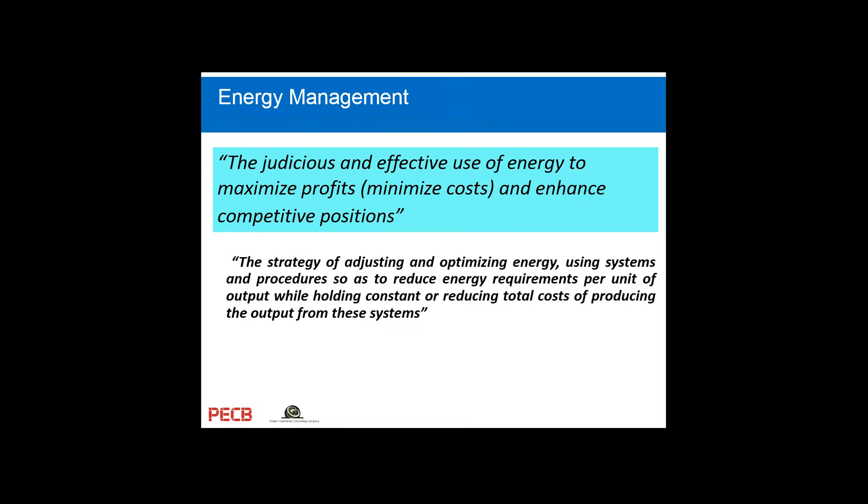This is what the energy management system is all about. Why do you want to implement it? Because you want to realize the savings. At the end, you have to give the savings in numbers.

If we take the term REDUCE to talk about the objective of the energy management system: R - reduce energy; E - educate your staff and students on energy and water management; D - document and publish information to achieve improvement; U - uphold legal requirements regarding energy use; C - continuously improve our performance and system; E - effectively utilize energy-effective products and efficient products and services.

What is energy management? You probably heard this term - there's a standard that talks about an energy management system. What is it about? Energy management is doing more with the same amount of energy, or consuming less energy. You're still going to have the same constant flow of energy in your organization, but how can I optimize my use and lower the use of energy so I can save money?

Of course, energy management saves money and makes buildings, organizations, and factories comfortable, healthy, and safe. Once you know what you're doing with energy and you're managing it, you will have, at the end, a more profitable and safer organization.

Of course, ISO 50001 ENMS - and I said why the term N was added - is applicable to any organization, whatever the size, geography, or location.

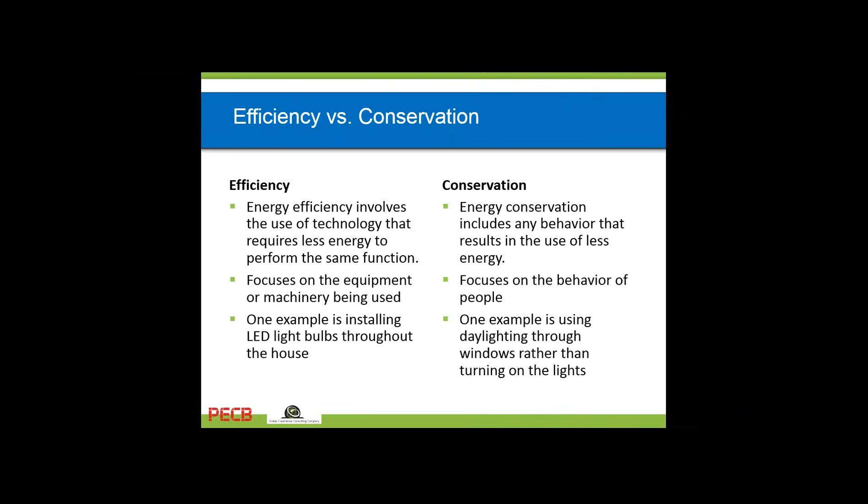Now, why ISO 50001? Why do organizations need it around the world? They need it because ISO 50001 is one-of-a-kind standard that studies your energy all over your organization. To have it, you need policy first. You need top management commitment. You need top management to buy into it so you can fix targets and objectives. You need to use data to understand decisions, make results, and continually improve it.

A system to improve energy performance talks about having energy programs, covers significant energy users, energy saving opportunities and action into planning, corrective action, and audit management programs. We're talking about a program.

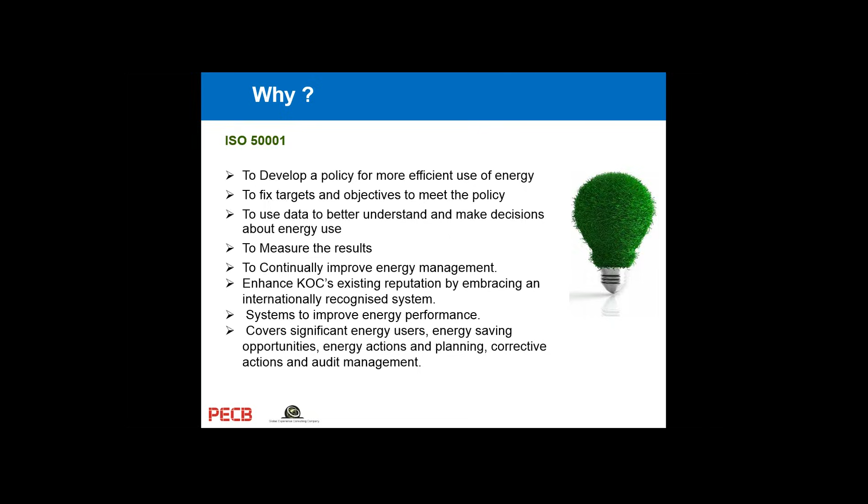For example, I'm giving here Kuwait as a primary energy source, and their consumption is a major source of greenhouse gas emissions. You've seen what greenhouse gas emissions have done to the whole world. It's a main issue now globally. They have in place what we call the Kyoto Agreement that studies the emissions of every country, and there are targets on every country around the world to lower their emissions of greenhouse gases.

Kuwait has now studied the matter of energy management and how the use or demand for energy has increased all over the world over the past 10 years. It's been crazy. So they are now doing an energy management policy to lower the use of its energy and depend more on renewable energy. And a lot of you will ask me, what is renewable energy?

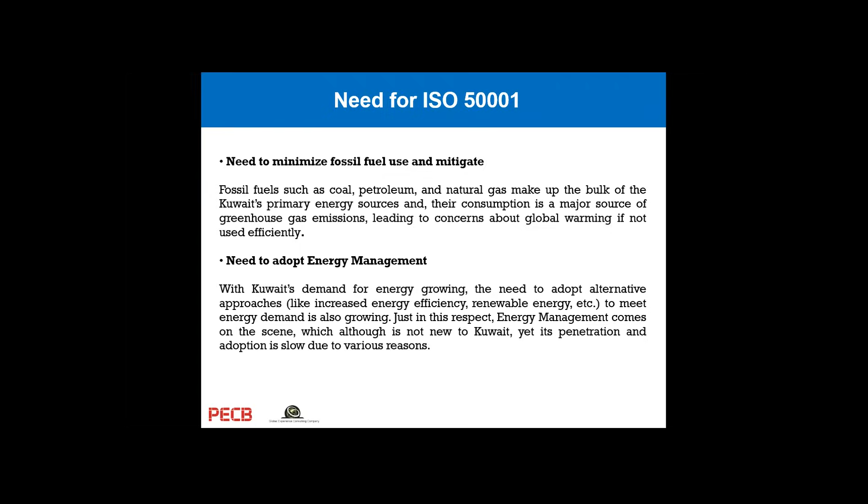Renewable energy is just like energy that doesn't stop producing from the source. We're talking about the wind. We're talking about the air. We're talking about the solar. We're talking about the heat and all of that. I'll talk about other examples from all over the world, but now I'm taking a specific example till we reach the international mind of applying ISO 50001.

The benefits, the main broad line of energy management: reduces consumption, increases comfort and safety, reduces pollution, makes our economy stronger, and increases our energy security. What I mean by energy security: when you consume less energy, electricity, water or gas, you give your country an energy security blanket where they can have more energy stored and transmitted when needed instead of consuming more. This is what we mean by the term energy security.

Now, the energy management system was issued in 2011 based on demand, and it gives organizations a model for continual improvement concerning their energy policy. It provides fixed targets, objectives, and targets to meet the policy. It uses data and measures the result. Now, you can ask me what's the difference between this system and 9000, 14000 environment, 18000 occupational health and safety, RC 14000.

I think the main difference between this standard and all those other standards is you have to sit down within your organization and draft a paper, start calculating, for example, your kilowatt per hour. The calculations are your baseline study where you can compare how you can improve in the future. So this system is not about management where we sit and discuss and come up with meetings, agendas and outputs. No, it's about measurement. You need to measure how much you consume of any kind of energy you're using.

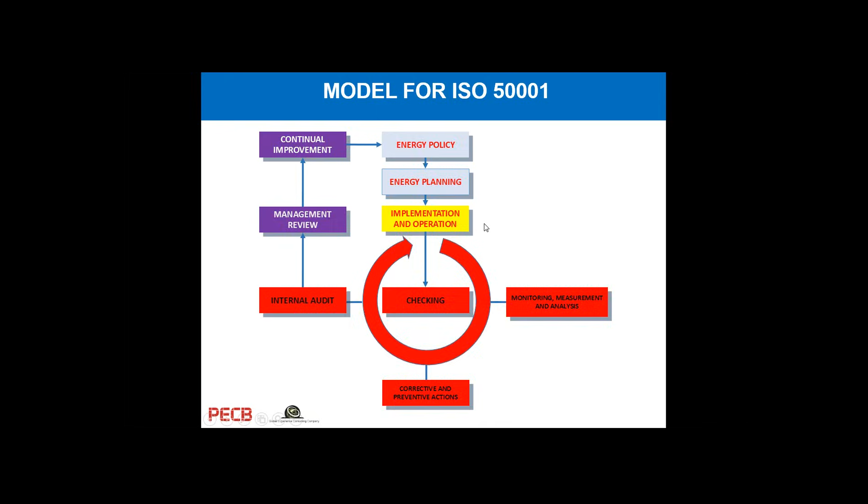We know the objective. We want to reduce energy consumption. We want to minimize energy cost. Does this flash a light for all organizations around the world?

Absolutely. Because if you ask any top management that runs a big facility with major energy consumption about reducing energy cost, reducing waste, and the effect on quality and product - the more efficient your energy use, the more reliable your machinery will run, because energy will always be there. So you'll have less downtime, less breakdown in manufacturing and equipment, and a more efficient organization. It works absolutely.

This is the weight of energy saving compared to other technology. Look at these statistics issued by the IEA, the International Energy Agency, comparing carbon capture and storage, nuclear energy, biofuel, renewable energy, to energy saving. Look at the energy saving - it's a big weight today compared to the use of all these other energy sources.

We'll discuss this further in my slides, but let's continue what we're discussing. You want to talk the language of top management when you implement any system, because top management will ask you: why do I need to buy into it? Why do I need to implement this international standard issued by the ISO organization through a technical committee that drafts the standard? Why do we need to use it?

We need to reduce our energy bills, especially with fluctuating prices. Two years back, oil prices were at $120. Today they are $60, and they're expecting them to go back to 80. These fluctuations make your production or consumption unstable. How can you stabilize your organization? You reduce your energy bill. You make your manufacturing more sustainable with a constant flow of energy, because the less you consume, the more output you can get from that energy.

You promote energy efficiency throughout your supply chain. You can talk about it to your suppliers, your users, your customers, your community, your stakeholders - everybody around your organization. That could be your employees, your customers, your suppliers, your top management, the board, or the community and environment surrounding that organization.

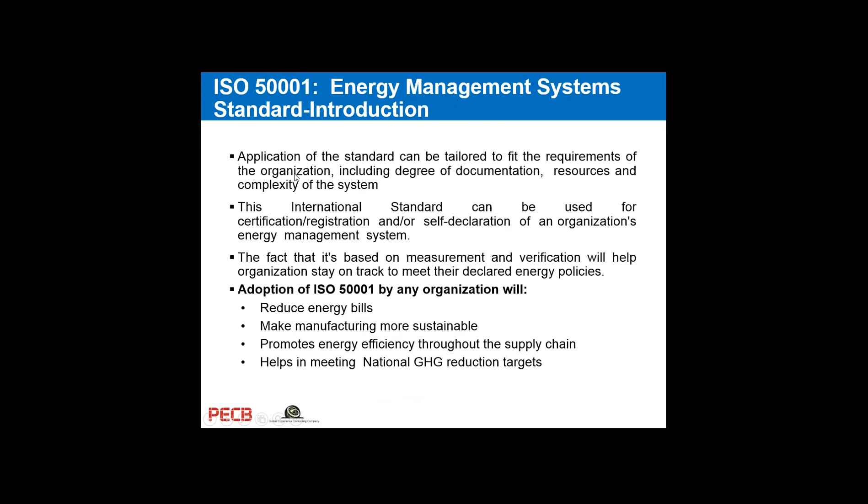Of course, when you consume less energy, you have less emission into the air. So you're helping the national greenhouse reduction target, and you're complying with the Kyoto Agreement, which tells you we need to minimize the consumption of energy. Do we need to minimize fossil fuel usage? Yes, of course - fossil fuels such as coal, petroleum, natural gas.

I'm giving an example of what they're doing in India. They are studying these sources and minimizing them through efficiency, because India's demand today is growing and very high, and they need to adopt alternative approaches. They're doing it - they have something called an energy management outcome, where if your organization develops or starts using renewable energy, the top government body will support you with subsidies, less taxes, more data and information, supporting it as a national energy management system.

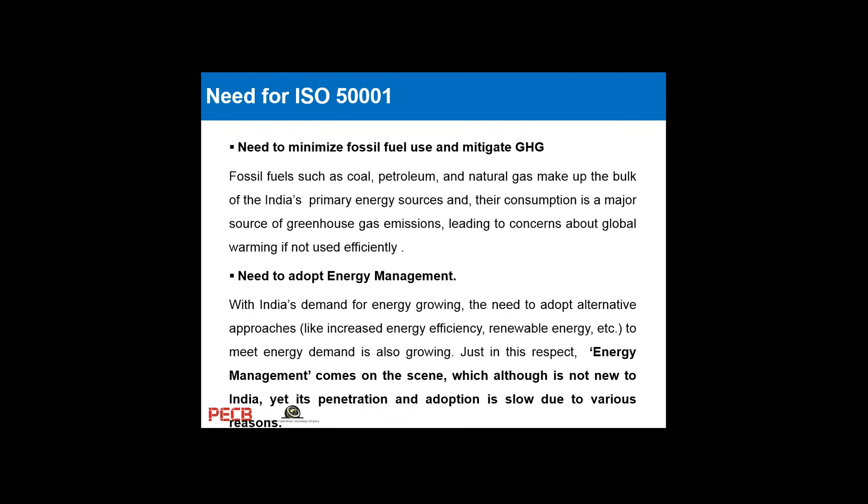But we know how the economy is growing in India, so it's part of what we call communicating the effectiveness of the energy management system. Now, what is the requirement?

Does the energy management system, EnMS ISO 50001, have certain requirements? Yes, it does. First you need an energy policy. Under the policy, you need objectives and targets, and an action plan to support that policy.

And you need an energy supply, uses and consumption study. You need measurement. A lot of people say, I reduce electricity by turning it off whenever I'm leaving the facility — that's not 50001. You have to tell me how much you are consuming. What is the design data? What is your procurement? We even study your shipments, how much raw material you're receiving, what are the shipping sources, and how much energy you're consuming there.

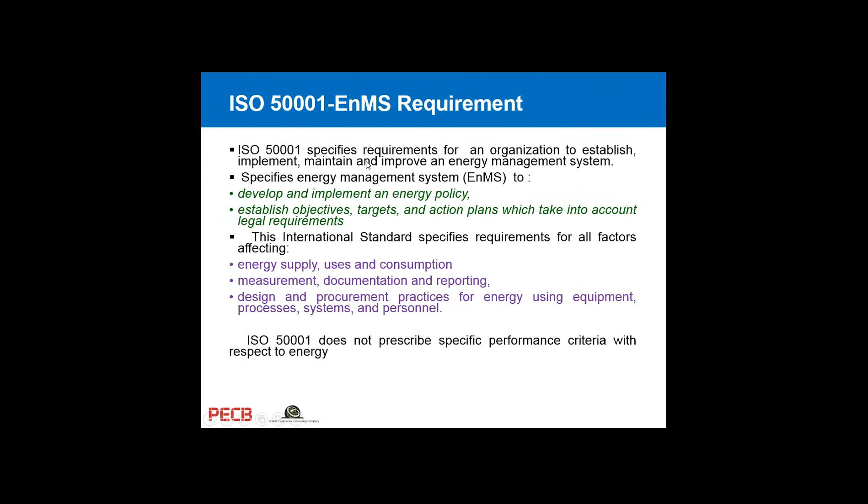We study everything, even the design and procurement practices, the design of your process and operation. How did you design it? How did you design your facility? Can we improve the design of the facility or the design of the equipment? You have two aspects of design here: design of facility, and design of your equipment and processes.

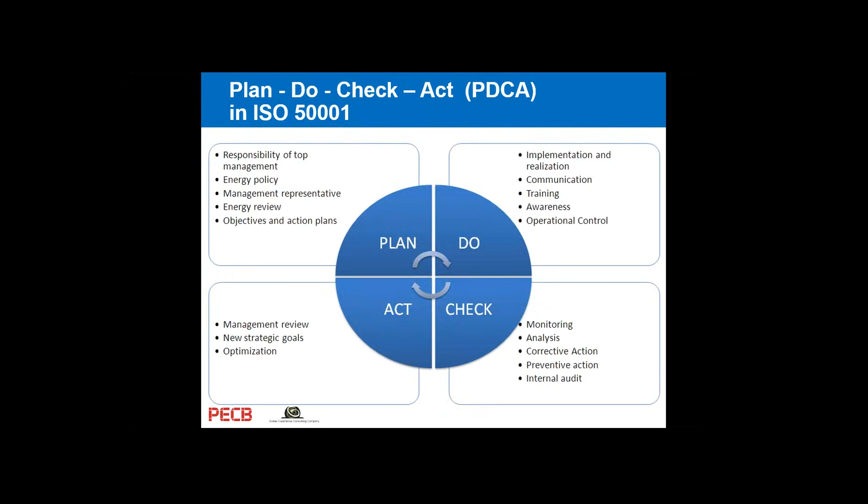As I said, this is Plan-Do-Check-Act, the main component of ISO 50001. I've developed them into a plan which talks about policy, representation of management, energy review, objectives and targets. Then do the implementation, the communication and training. Then check the monitoring and measurement. And act, which is the management review, where we study the strategic goal and optimization, and how we achieved them. This is again the PDCA cycle I talked about.

Energy management — what do we start with? The main point we start with is the policy. We talk about the availability of policy, and inside the policy we need the scale and nature of the organization to be documented. We need availability of resources and support. We need communication and commitment toward the policies and toward regulations and other requirements.

You cannot say, I'm violating the law, I'm using energy that's not acceptable by the government, but I'm applying ISO 50001 — it doesn't work that way. You need to apply applicable regulatory requirements to set forth what you are doing, and make sure you are applying the law of the land where you operate before you hit ISO 50001.

And last but not least, support the purchase of energy efficient technologies and services. You cannot sit in your factory and say I'm not going to do anything about it, and if a new machine comes in I'm not going to worry about studying its consumption or prices because I can't afford it. Today, an energy management system will help you afford buying new technology by minimizing energy use and achieving more savings.

For example, in India, energy policy declaration by an organization is seen as a top management commitment toward continual improvement. By the way, we don't use the term 'continuous' anymore, because continuous means doing it around the clock for 24 hours. Continual means you do it within your capacity or ability to apply the energy performance plan.

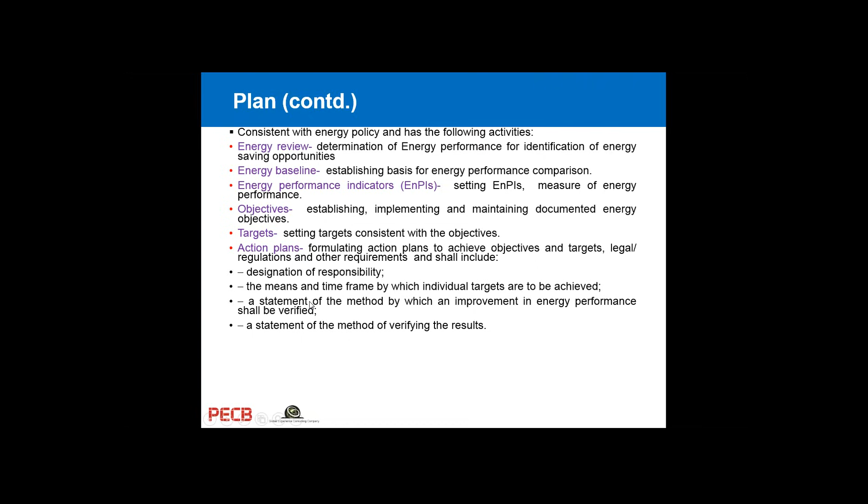All right, the action plan, we know what it's all about. And then you go into implementation and operation, the 'do'. After the plan, remember: plan, do, check, act. We need to have an action plan to communicate it to the workforce.

You cannot tell me that you are implementing an energy management system and you don't have the energy management system policies on your website, on everybody's computer inside the organization, on the walls, on the entrances, so people know that you are turning off all the lights whenever operations stop to save energy, that you are using large scale windows that let light in so you can use less electricity inside the organization, that you are moving from a regular bulb to LED to save energy, that you are shifting production from these old machinery to new machinery because they consume 50% less energy.

Since we're talking about implementation and operation, all international manufacturers of cars, equipment, machinery - all they do from year to year is introduce a new line of machinery that consumes less energy. That's one of their main objectives. Because if you tell a buyer, you buy this machinery and after 3 years it consumes more energy, nobody will buy it. This is one of their main targets: to stay in the international market and sell machinery, you need to save. That's the bottom line. If you tell the consumer your machinery consumes more energy after 3 years, nobody will buy it - you'll be outside the market.

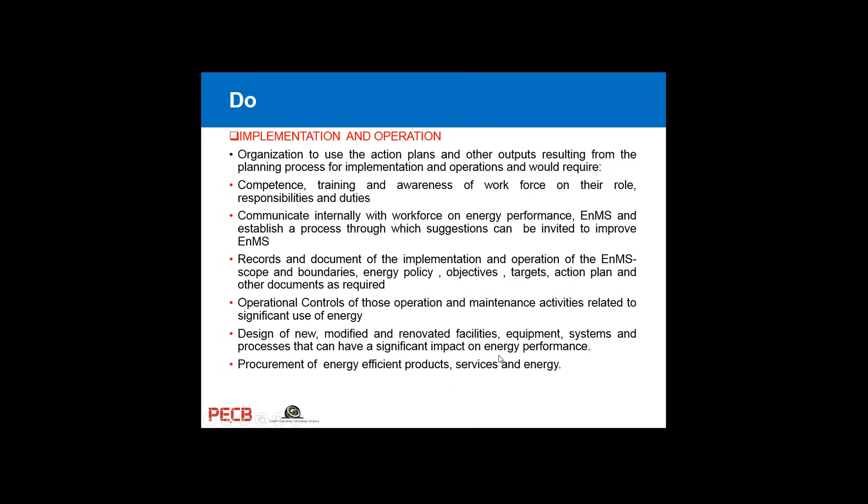About monitoring and measurement, you take corrective action on your energy performance indicator - did you hit it, did it work? And you internally audit that system, because at the end of the internal audit, you need to act. You can act through corrective action, preventive action. You can act through continual improvement of the system. You can act through management review.

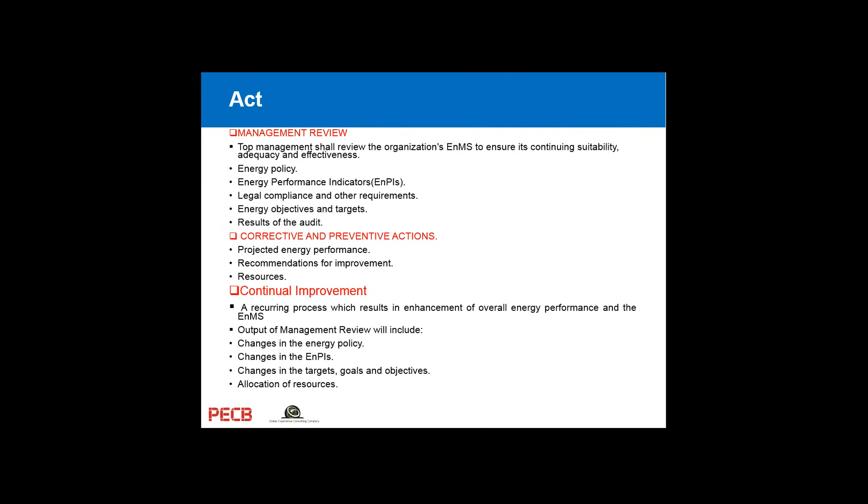Comparison between ISO 9001 and ISO 50001. ISO 50001 is proposed to be in line with 9001 and 18001. We know it was designed in line with these standards and uses the same approach.

It uses the same PDCA cycle. ISO 9000 fulfills the customer's quality requirement. The main backbone inside ISO 9000 is the activity. You study your activity in order to satisfy the customer and apply regulatory requirements. So this is the spinal cord of ISO 9000.

14001, it's about the spinal cord of ISO 14001 environmental management system, studying your activity, aspect, and impact on the environment, on the people, on the flora, fauna, fungus, human beings, and everything surrounding that organization. Similarly, ISO 50001 implementation is expected to address how to effectively manage energy sources through an energy review study, energy baseline, and then energy indicators in the future.

All these global standards work for you. ISO 50001 is a new standard, just declared. Everybody is interested in it, and there's international recognition for this standard because of its benefits. It assists you in making better use of your existing consumption assets. It creates transparency and communication between managers about energy sources.

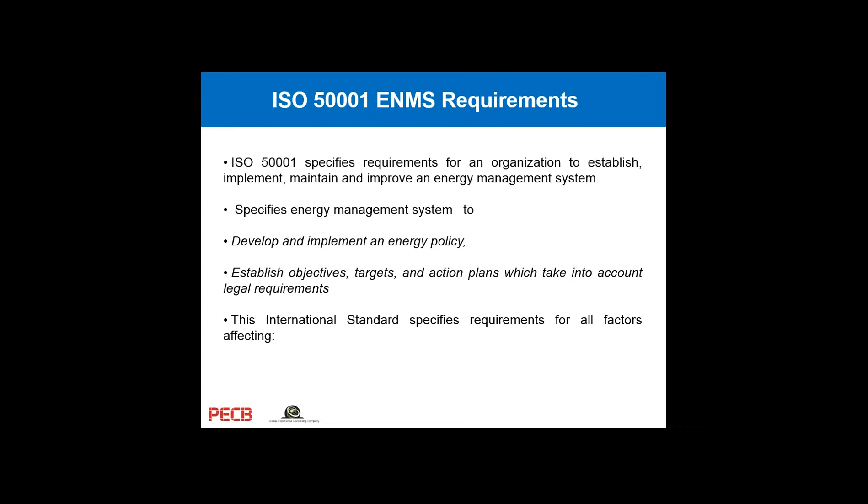You need energy supply, uses, and consumption data. You need measurement. You need to design your system and make sure that it works. How can you buy into it?

Top management commitment - no top management commitment, no system. I've seen it happening all over the world. The management does not buy into it. They think it's hard, they think you cannot implement it.

It's your way as middle management or lower level management to sit down with senior management and explain to them how we can do it, how we can put the mechanism for implementing ISO 50001.

First, you need to establish a team. You have to have the team understand the standard. You have to do gap assessment. You have to have a work plan definition. You have to work the plan to close the gaps, and then you go for certification once you have the system.

Of course, I changed all the lighting in my house about a year back. I don't want to tell you what happened with my wife because she hated me - she wanted to kick me out of the house. But beside that story, I changed all the lights into a light emitting diode lighting system.

You know, these lights give white, bright light, and my wife was saying the house looks awful. Anyhow, I told her it's either we change the lights or change my wife. So we decided, yeah, we'll change the lights. Anyhow, that was a good, easy solution.

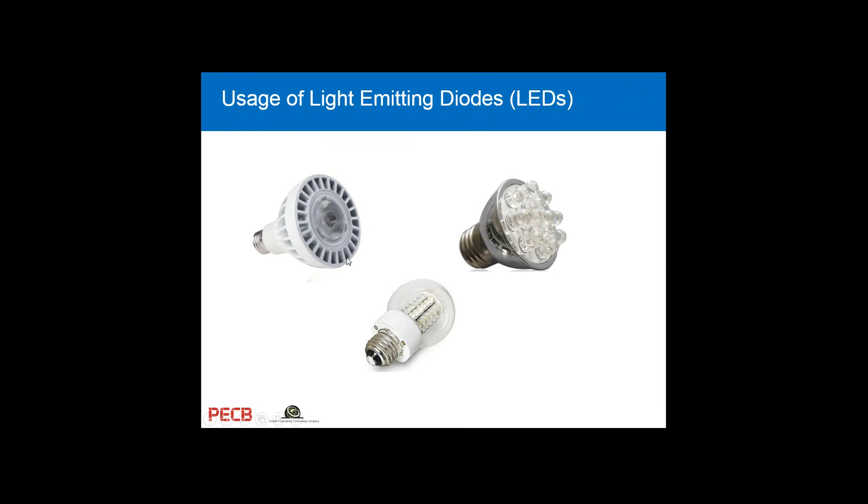And let's look at the light bulb comparison. We have what we call the regular bulb, the incandescent bulb. We have the halogen, we have the compact fluorescent, and now we have the LED, the light emitting diode. Look at the brightness - you will see that the brightness is the same.

The main saving here is what? The life of the bulb - 1,000 hours versus LED's 25,000 hours. Look at the energy use - you're going from 60 watt to only 12 watt.

So after one year, yes, my energy bill - I kept my wife and the energy bill went down. That was my main target, okay? And look at the price per bulb - although you have to invest more, you get more lifetime.

And I'll give you an example. I used to buy small fans for my house from Germany. One time, two of my German fans blew up, so I had to buy these from China. They were the stuff you find on the shelf without any quality certificate or anything, but they're very cheap - only $3. So I bought them.

And I had to change them every 15 days, paying $3 each time. The German ones, the quality ones with CE marking, certified with ISO 50001 energy management system, were running smoothly for 7 years. Imagine the cycle of changing them between 15 days and 5 to 7 years, and imagine the energy saving I had when using the good quality ones produced by a system certified by ISO 50001. So what did I do? I threw out the cheap ones and went back to the German ones.

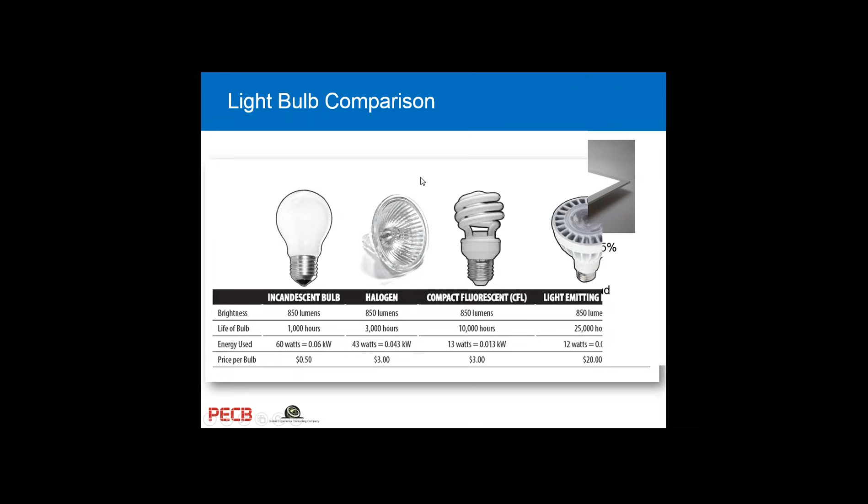Now, example of energy saving we have in KOC, Kuwait Oil Company, one of the main oil companies in Kuwait. They have taken advantage of using the energy management system. This is a landmark done on behalf of KOC. The total consumption was 35 watts compared to 140 watts, meaning they achieved 75% energy saving when they recently moved from tube lights to LED light emitting diode bulbs. It was GE, General Electric Luminaires, providing good efficiency lighting which influences work performance and well-being, with uniform illumination surface.

Sustainable green choice for energy saving, with a long life of 50,000 hours. Think about it, if you're sitting in the house and the light bulb works for 50,000 hours, that's awesome. Remember, we're lazy at home, we don't want to go and fix things, especially with the wife, right? She's telling you, do this, do that, change this, change that. When you have less work at home, you feel comfortable, you feel you have sustainable energy, and you have 2,000 days to count for it. Beautiful.

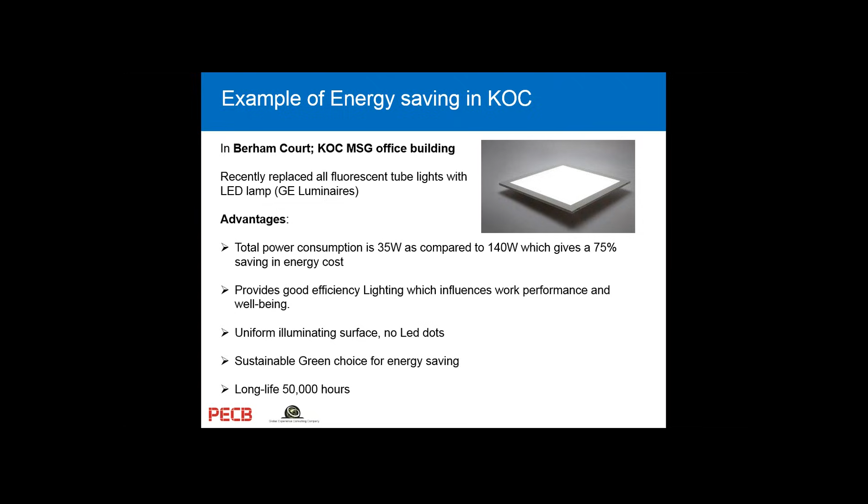Now look at the global energy demand. We have the conventional sources, oil, gas, and coal, and the alternative sources we talked about, nuclear, hydro, biomass. Look at the renewable energy. What is the definition of a renewable source? It doesn't stop producing, you will never have wind that stops happening. Wind keeps reproducing itself. Solar, wind energy, look at the increase in percentage of growth: solar at 9.6%, and wind at 12.4%. Awesome, you look at the graph and see the increase in usage of renewable sources. It's free, it's out there, all you need to do is put equipment and capture it.

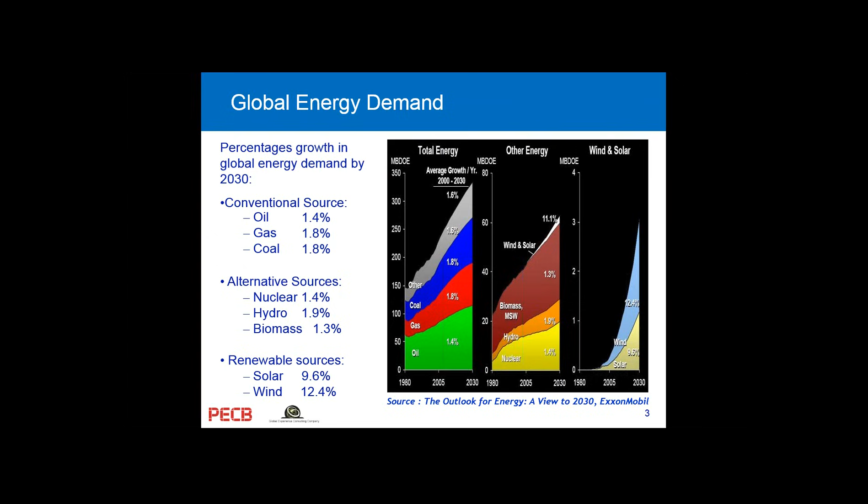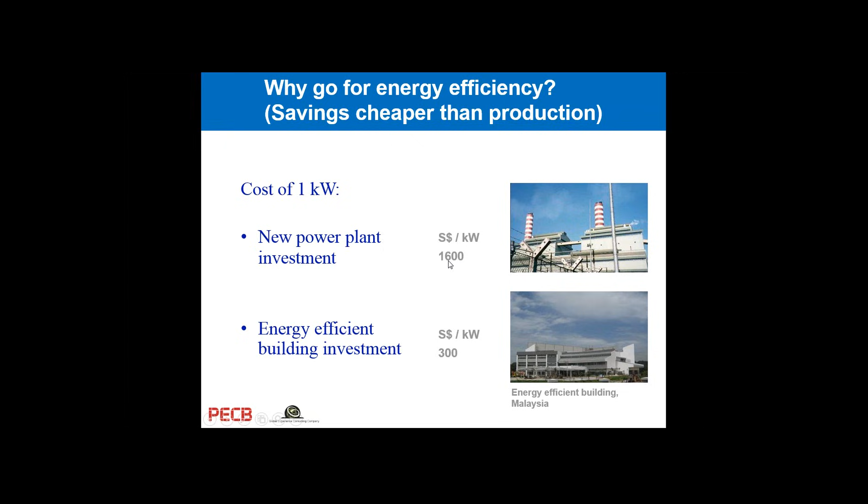And there is a global demand for it, and I think this is the bottom line for saving energy in the future. What does energy efficiency talk about? Saving is cheaper than production. For example, look at this new power plant investment at $1,600 per kilowatt, and look at the energy efficient building investment. You build an energy efficient building, you consume less electricity, and your cost per kilowatt hour will be less, from $1,600 per kilowatt to $300 per kilowatt. This is electricity, the main source of energy around the world: generation, transmission, distribution, and going to the customer.

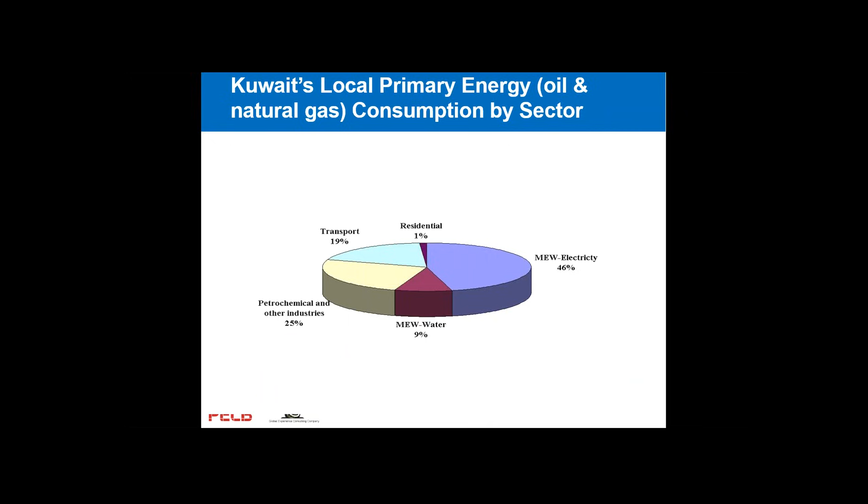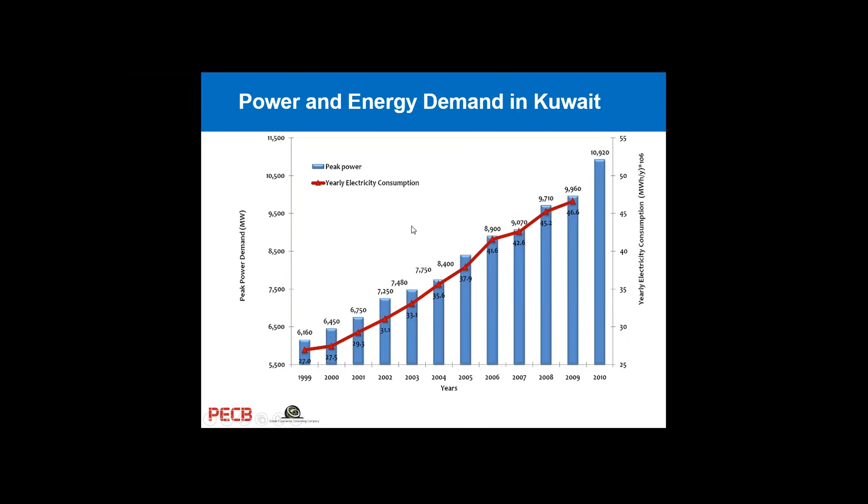And look at power and energy demand in Kuwait. It's going crazy, never stopped, never went down. From 1999 till 2010, look at the numbers, till it reaches 10,920. Wow, it's peaking. And this is in million watts.

If you study the behavior of energy use in Kuwait, you'll see July is the peak, and the main peak months are May, June, July, August, and September, where ACs and electricity are the main focal point during summertime because of the hot weather. We have very nice hot weather, it only reaches 55, sometimes 56, 57, which is very nice.

But anyhow, it's time to find an energy efficient methodology, policy, energy management system that saves us during May, June, July, August. Because imagine what happens if you have an outage or breakdown in your electricity production - you will have a major problem.

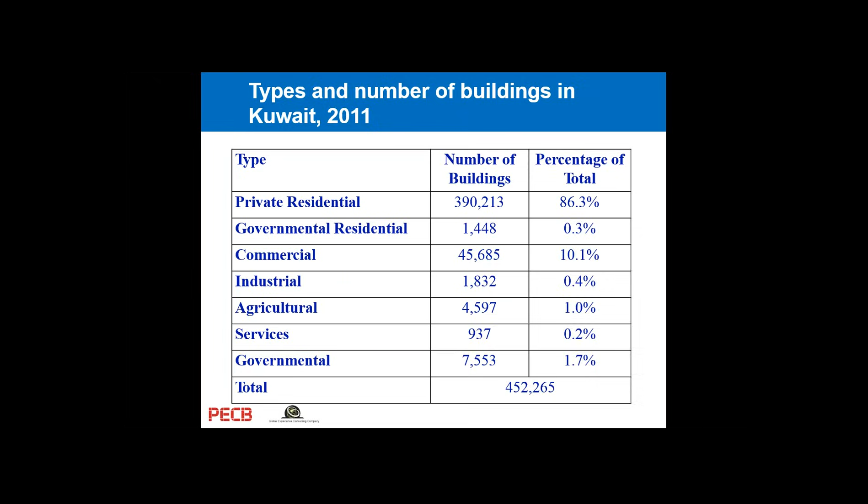This is the type of numbers in buildings in Kuwait, and you'll see again private and residential are the main part of the Kuwaiti community. Talking about energy and utility facts about Kuwait, AC and lighting in buildings account for nearly 85% of the peak electricity and 60% of the annual consumption.

Fuel share in power plants is about 84% for electricity and 16% for water. Imagine the waste - we're wasting energy. We need to talk about subsidizing electricity charges, another way to look at this.

Do you know how much we charge? We charge you in Kuwait, if you consume electricity, 2 fils per kilowatt. That's less than 1 cent per kilowatt per hour. Imagine the actual cost on the government, which is 40 fils, almost 15 to 20 cents per kilowatt hour.

Wow, look at the subsidized difference. Look how much the government is producing. The government is taking a load in order to produce for your electricity, for your energy, for your lighting, and for your AC.

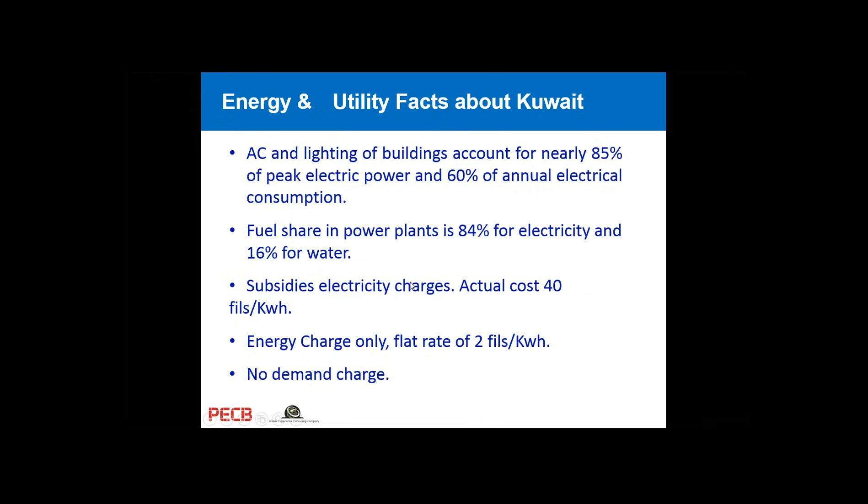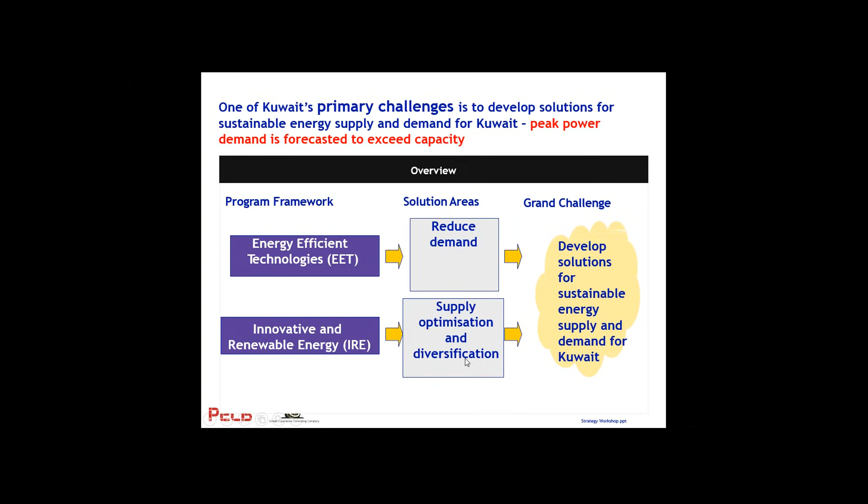The Ministry also talked about the code of practice where you should understand how the energy management system is transferable. I think the whole issue starts with the home and then goes to the whole area of the government. To implement an efficient management system or energy program, we need to start at home before any facilities around the world. I think it's a governmental issue to study reducing demand, supply optimization and diversification to develop a solution for sustainable energy.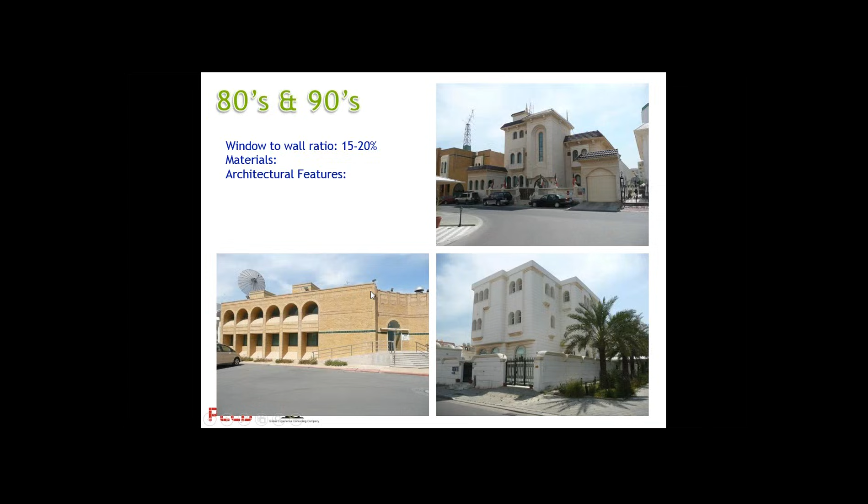Look at this, prepared by one of my colleagues - I loved it, Engineer Sayed prepared it for me and I told him thank you. Look at the window to wall ratio - it's only 10% in the 60s. Look at the 80s and 90s, only 15 to 20%. Now look at 2000 to 2010, the window to wall ratio is 30 to 50%.

More lighting, you get more lighting in, but you get more electricity use. And this is the comparison of what's happening around the world.

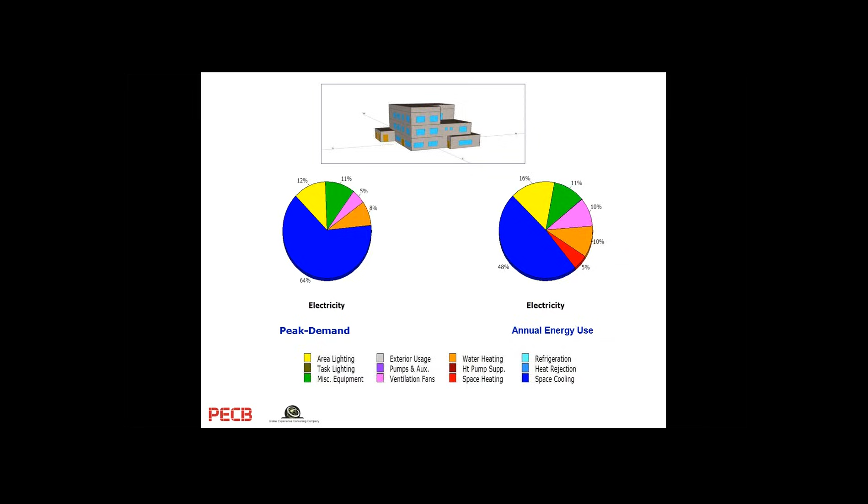All right, now these are case studies. I'm talking about what they did in the United Kingdom. By the way, we're coming to the end of it, so we're going to start taking your questions and answers. So feel free, after all this pressure, take a deep breath and start listening.

This is what they did at Coca-Cola Enterprise in England, Europe's largest drinks manufacturing facilities. When they wanted to implement ISO 50001, Coca-Cola invested 51 million British pounds in improving its operation at Wakefield, producing around 6,000 cans of soft drink every minute. The plant cut water consumption by 10%, and energy use by 16.5% with the new design. They started implementing ISO 50001 as part of Coca-Cola's ambition to become a low carbon business.

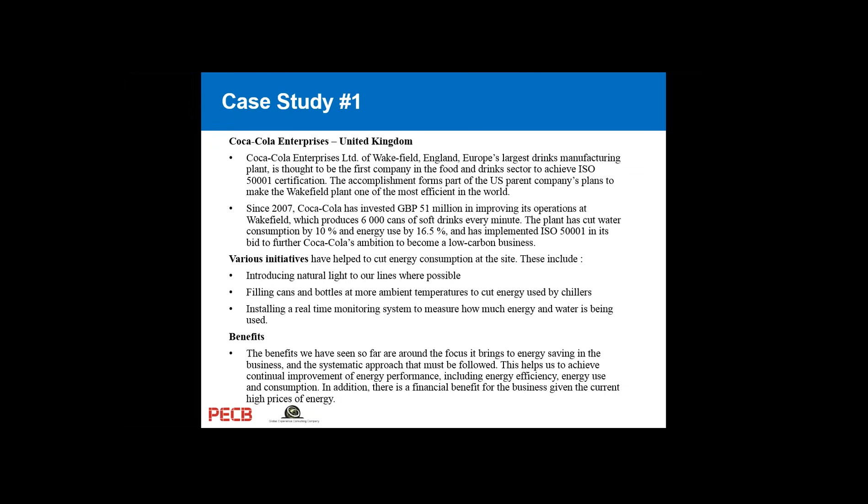Now this is another case study from Sri Lanka. They describe the usage of a 5-star resort, which recently became the first hotel in the country to achieve ISO 50001 certification. The decision to implement the energy management system was taken by the owners at the time, at Aitken Spence Hotel, and management used it as a tool to reduce energy consumption and to tell their residents that they are caring about the environment.

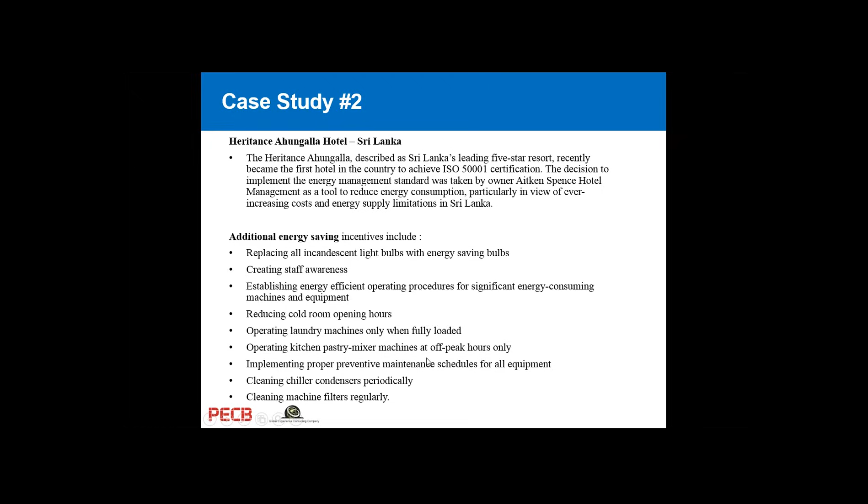They had initiatives such as replacing all incandescent light bulbs with saving bulbs. They created staff awareness. They had efficient operational procedures. They reduced cold room opening hours. They operated laundry machinery only when fully loaded. They operated the kitchen pastry mixers at off-peak hours only. They implemented a proper preventive maintenance schedule so the machinery had fewer breakdowns. They cleaned chiller condensers periodically in a predictive maintenance program, and cleaned machinery filters regularly so the machines run faster, giving more power and more efficiency.

Case study 3 comes from Bentley. I love Bentley - everybody wants to own a Bentley one day, but not today, maybe one day. They started implementing ISO 50,000 in their main plant in the United Kingdom.

By the way, some organizations, especially in Europe and the US, are using the 50,000 standard as a way to lower their insurance coverage. They tell insurers: we are sound, we are energy efficient, we care about energy, we have a system to monitor our energy, we are a safer place, please lower our insurance premium - and it's happening. They're getting a lot of insurance premium cuts.